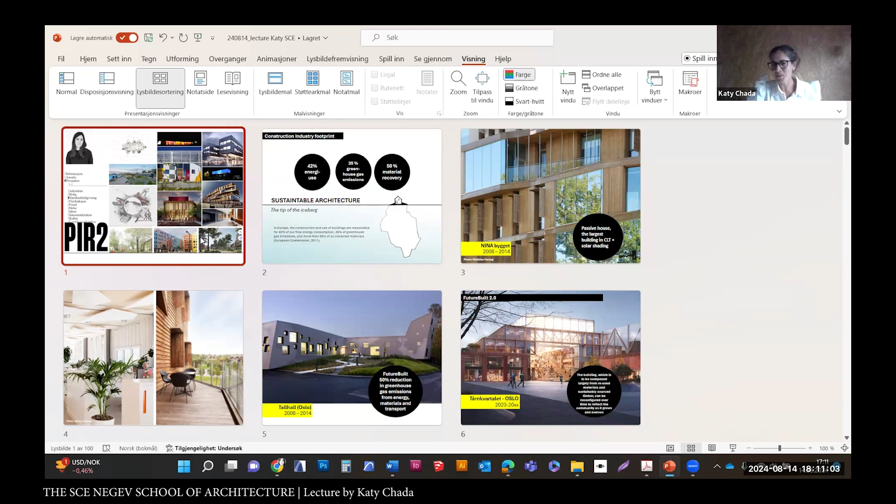Thank you, Florian, for inviting me and for the very nice presentation of myself. I have prepared some slides, quite many, so I hope they are interesting enough to keep you alive. I hear you are in the last part of your semester, so let's get started.

I will shortly talk about the office where I'm working. It's called Pir 2. In Norway, the partners started the office 30 years ago. We have offices in Trondheim and in Oslo, the capital of Norway. I've been a partner in the office for 15 years now.

I've been involved in very many of the projects, and I've also led the office in two different periods. This is just a sample of what we do. We have landscape architects, interior architects, regulation architects, urbanism specialists, and a huge interdisciplinary team.

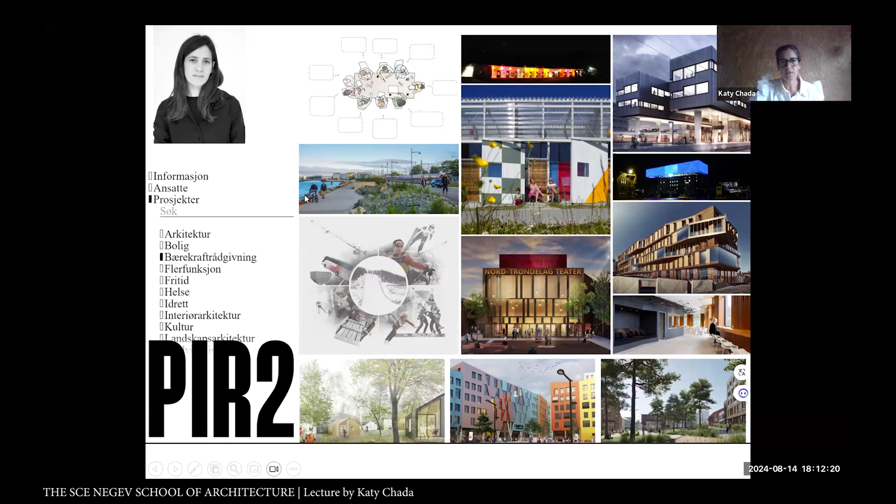We do a wide range of different building typologies, so I'll just show you a small selection of projects, probably the ones that are more distinguished because they have a more ambitious profile regarding sustainable architecture.

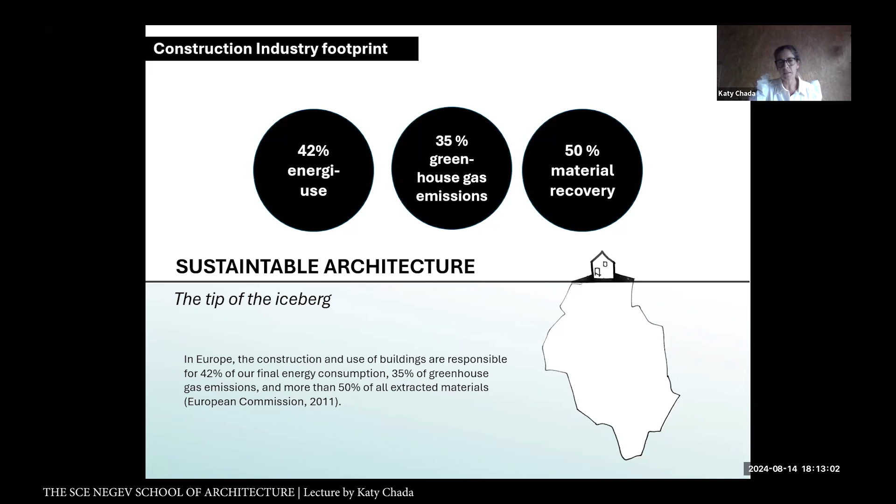Everybody in the room is probably aware of how the construction sector is responsible for emissions, energy use, greenhouse gases, and material recovery issues. As architects, we have a strong sense of responsibility for the resources we work with, so in every project we try to do whatever is possible to make more sustainable architecture and environment.

These three projects I'll talk about are probably at the forefront of other projects both in Trondheim and Oslo, and in the office in general — some of them gave us the opportunity to experiment with more advanced solutions in terms of sustainability.

This one is an office building called NINA, for ecologists actually working there, who had a strong ambition of doing good with nature. This is the first passive house in Trondheim, the largest building in CLT, and we explored a variation of solar shading to achieve shadow on the facades, but also to make interesting zones between the working offices and outside recreation places during breaks.

In Oslo there's a project called Future Built, a pilot project aiming to show it's possible to be net positive. It started in Oslo, and now it's in six main cities in Norway; this year it's about to be in Trondheim. This was our Pir 2 first Future Built project, about 50% reduction in greenhouse gas emissions from energy, materials, and transport, meaning we had a lot of conscious thought about what materials to use both inside and outside. For instance, the facade is 100% recycled aluminium.

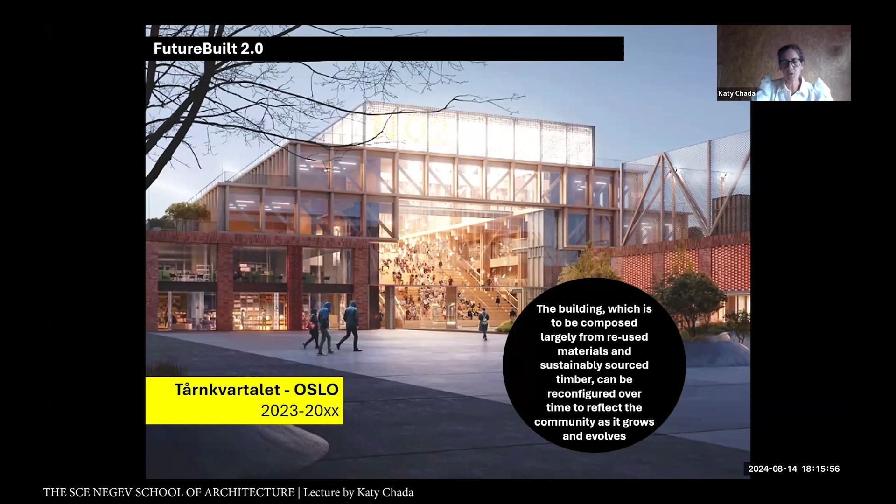So these are our most ambitious projects regarding sustainability.

Just briefly, some numbers: there's a national climate goal in Norway, as in every other country I guess. By 2050, Norway is supposed to be climate neutral, with a reduction of 95% of greenhouse gas emissions.

95 to 100% material recovery. So it's an ambitious plan in quite a short period of time.

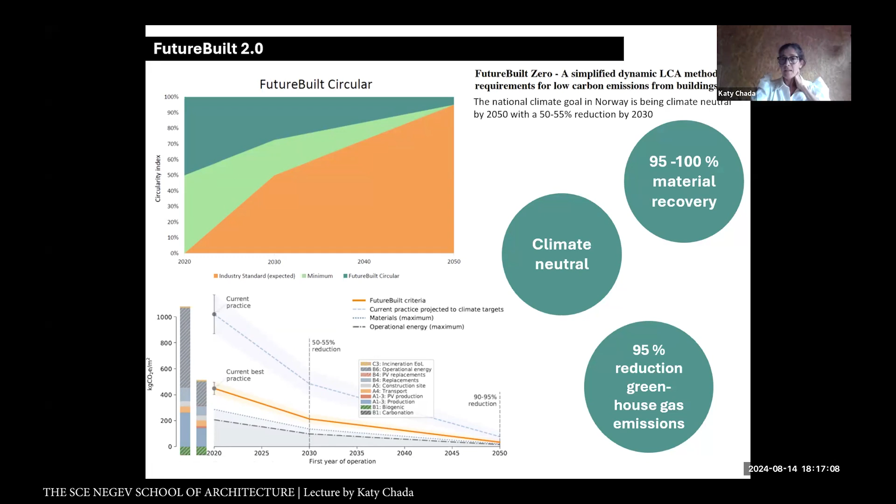So this one, the green one, is this ambitious Future Built projects, and this orange is showing industry standard, like conventional buildings. So in the end, or by 2050, we're supposed to meet all together in very ambitious climate neutral goals.

Meaning there is a way forward, but there are only few projects able to be very ambitious in the beginning, and the others are moving quite slow. Transitions towards sustainability involve technological, social, behavioral, and institutional change, which are really needed, and in an urgent way.

The pity is that in architecture, the impact is still very much related to individual buildings, and we need a systemic approach and a design methodology which follows the goals we have to achieve as nations, to be where we want to be in 2050.

So my question is: how can architecture transcend its narrow designing role and become a socio-ecological tool instead? Go beyond the building as an object, or especially an individual building, but move towards a more systemic approach.

In the future, so my own transition is moving, as Florian said in the beginning, from hardcore building industry to regenerative practice, which in the beginning, I think, is more in my search to understand the place - meaning nature and people - and designing processes and buildings as well.

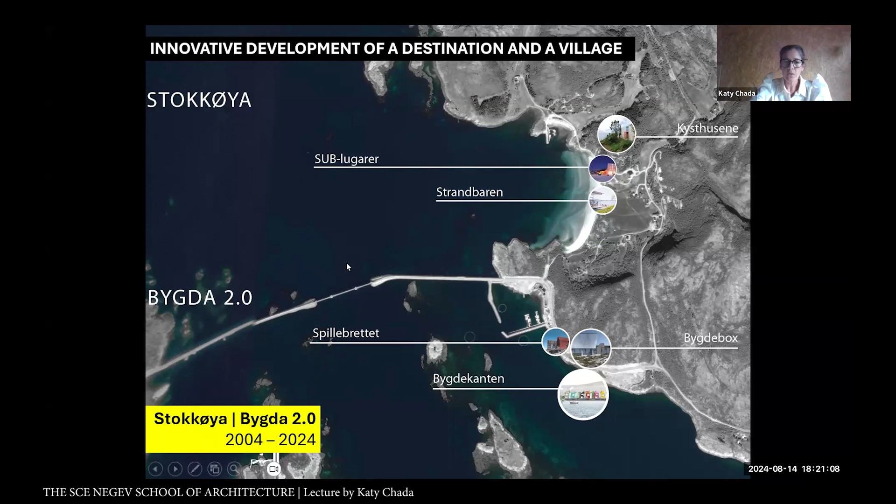So this is kind of an ecosystem. It's been developed for 20 years now. And I will tell a bit about how the process was, since I started working at the office in 2004.

This is the model, which was actually my first task. So I have an emotional value attached to it, and also because after these years, Roar and Turid are also my friends. They're really people connected with their environment, fishing and farming, and highly valuing the nature around them, living in contact with nature as well.

They're creative people and very visionary, so we've been lucky to have them as clients, accompanying them, sustaining the local identity, community, and environment. They have huge ambitions and pillars like nature, architecture and design, food and experiences, culture and art, and meeting places.

Their vision was to make a place, as I said, which was interesting both for them to live there, for their children to raise, but also to attract creative people to the countryside, where, like everywhere else in the countryside, we experience a brain drain - the creative or more forward-thinking people are leaving the countryside towards the city.

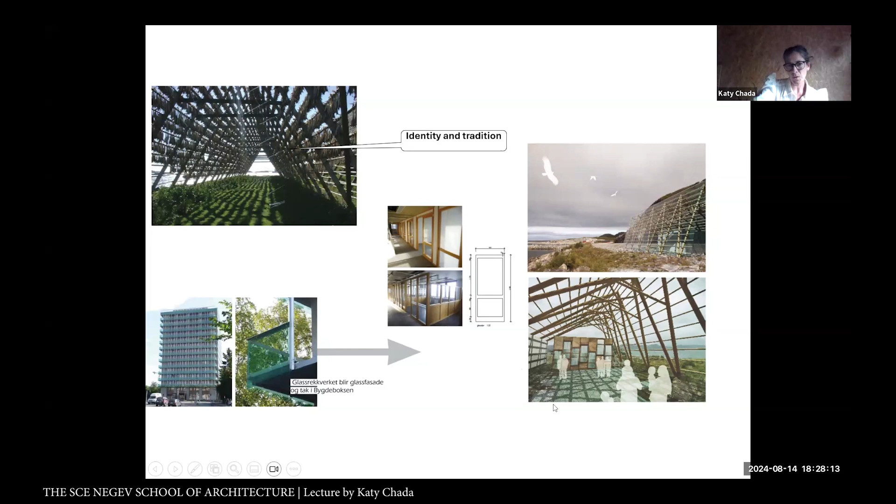The other interesting thing is that we were working with half-climatized zones, which is less expensive to build and rougher in its expression, because it's supposed to be a lab and a meeting place, a multiple functional room for whatever the need was.

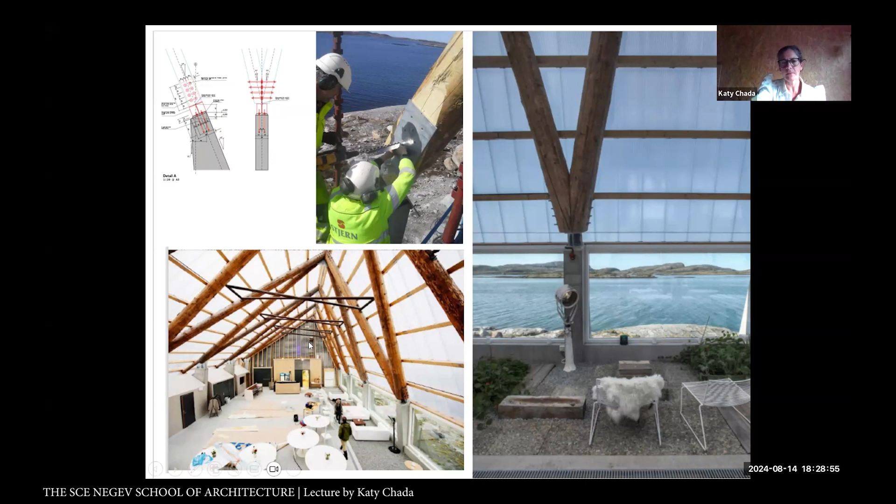So the idea is that very different activities take place there, like for instance a brewery, bakery, carpenter place. There is whatever is functioning at the moment, and once it's already up and running, it will scale up and out and become part of the ecosystem, attracting more and more people to live and work there. So it's a very interesting place to develop this village.

Also, it's an office hotel, so people visiting or owning the cabins could come and work here. It's always full, and it's super nice to sit there and work with internet connection while different people are doing different things. So it's a co-working space that works perfectly, especially during the pandemic and after, because it started with another rhythm of weekdays.

There is also a bakery which won the Norwegian National Prize last year for the best bakery in the whole of Norway, so the quality is amazing. There is a pair of Italian people who moved there to run their bakery, and they are now based there all year round.

So this is the project for when people are moving to the countryside, they needed housing, and also interesting housing - not just housing that's been there for ages and expensive to rebuild, or not interesting, but trying to have some urban qualities into the housing in the countryside.

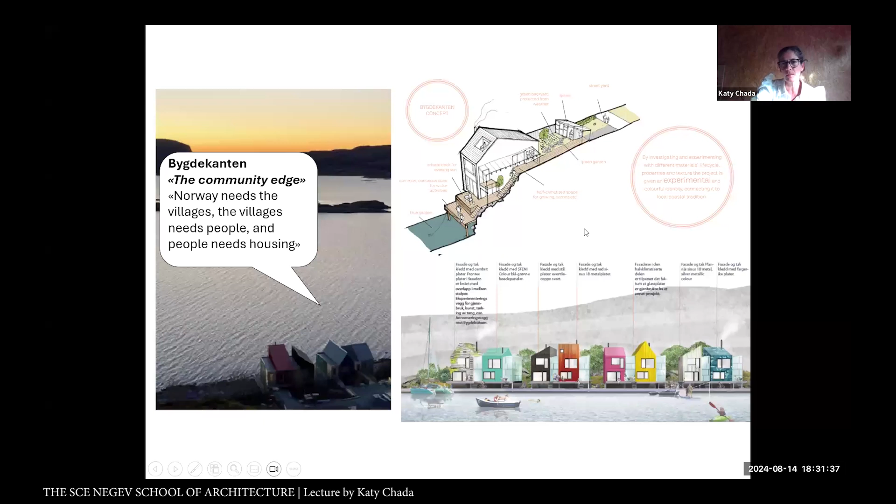So by the time being, only 4 of them are built. It's on this side, and 4 more are still to come. So here you see the structure, different sizes of houses to have some variation, but everyone with the same principle.

So there is also playfulness with colors and materials, and here you see these half-climatized zones, which have the stairs and the connections to the climatized part of the houses. So here people are bathing all year round and kayaking, having both qualities of urban and rural long days.

So this connection with the exterior and interior - it's very rough out there, it could be very windy or rainy, but beautiful at all times. So this transparency really makes the impression that the house is bigger, even though it's very compact in the planning.

So a micro community takes shape. There are more houses there - 3 more which are now in the building process, and it's going to be another cabin project to the right here, and we are at the moment developing a regulation plan for the last site of Bygda.

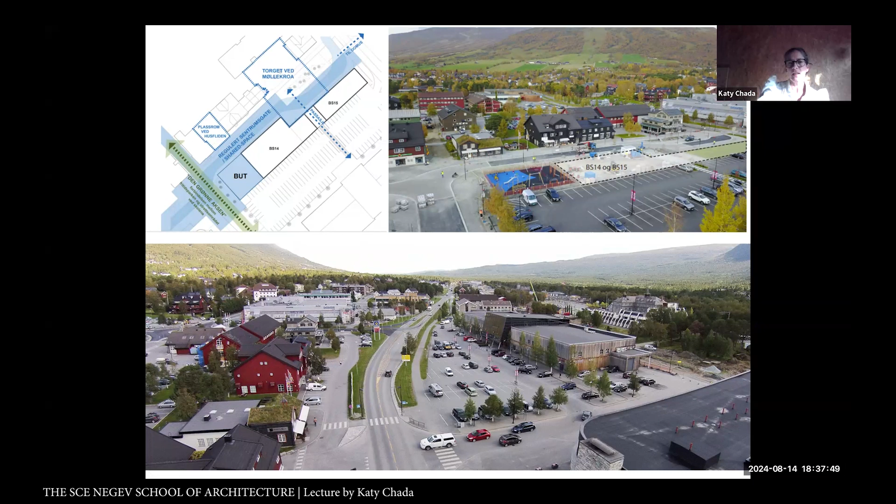In the end, I will just go through what happens in the beginning and in the end, and how it comes that architects being outsiders - even if we were collaborating with the locals - how is it that we kind of miss the opportunities of bringing together people and place in the early phase of the projects?

So this is the concept. I will not use very much time on it, but the plot was really long - like 90 meters and 13 meters in the other direction. And the program was mainly offices, boutiques or shops on the first floor, and a climbing tower, which was supposed to be the highest in Norway.

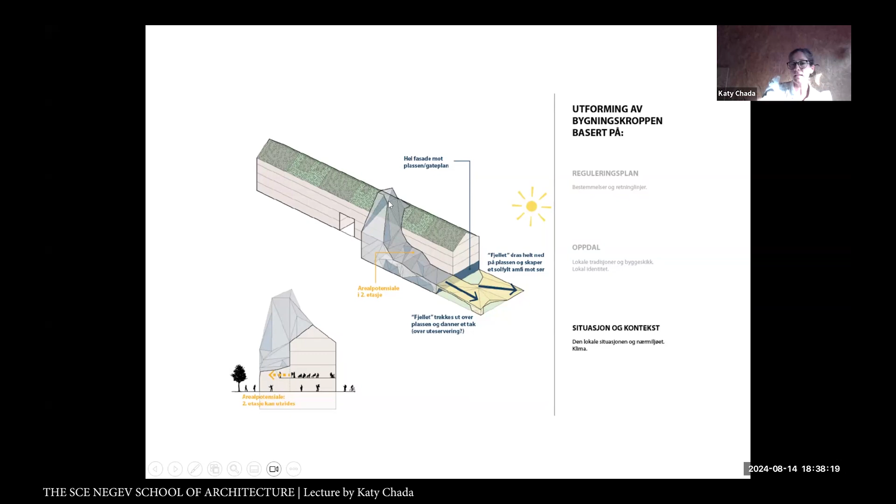So we did this concept of the very traditional barns, which you see in every place in the countryside in Norway, and based on local identity, tried to build a mountain. So the huge climbing place inside will be also a place to be outside.

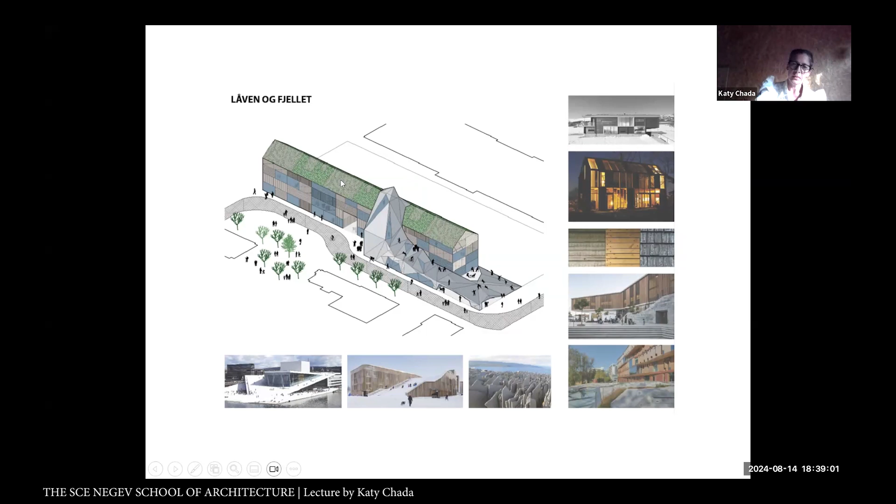Once we thought we take the very best site of the city, then we should try to give something back to the inhabitants, so everybody could be there and use it. So our main idea was to make this mountain very attractive, both for climbing and cycling, and just as

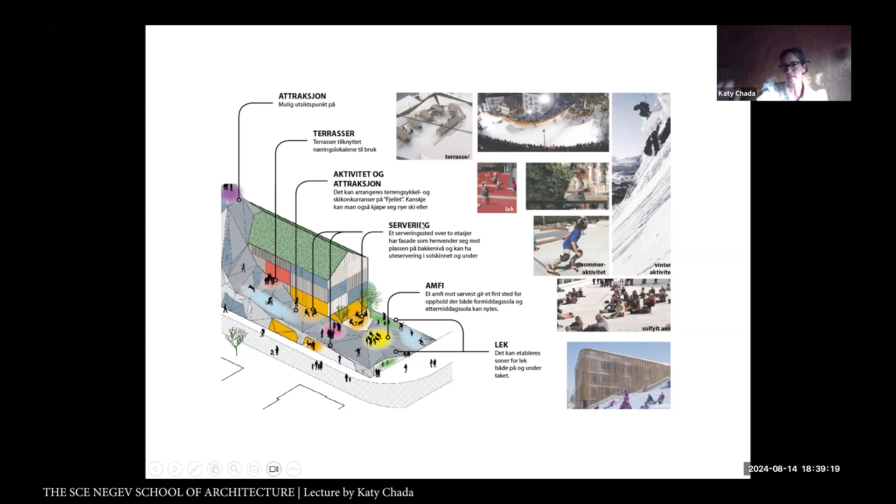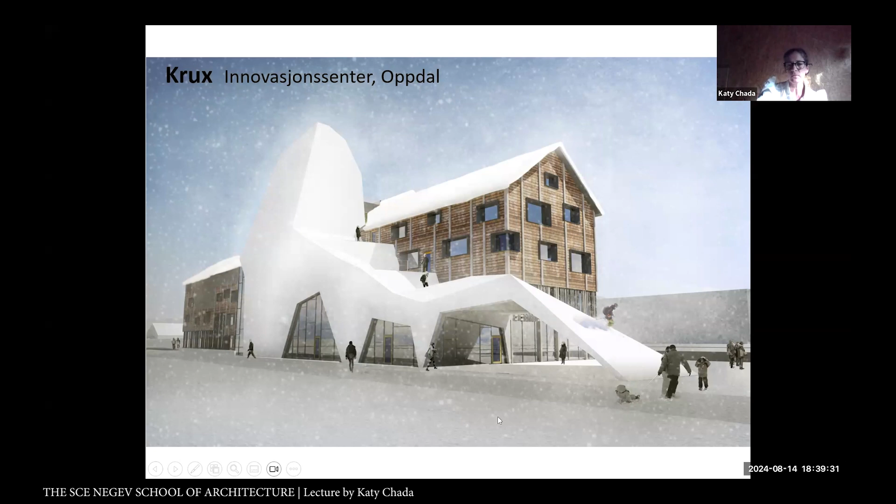an amphitheater or to play or whatever the activities during the year should be. So this was one of the early visions of how the connection between the building and the place should be. We did a lot of drawings trying to convince people that even if they did have a nice place or playground for children, it could be better if it was connected to the building.

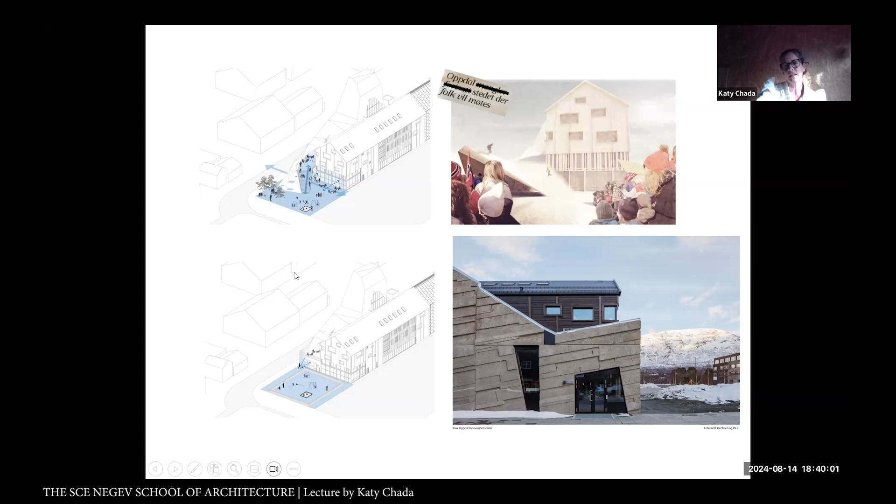But there was massive protest, and in the end, they didn't want to make this construction, but they didn't want to have it as it was before we had the building. So this was one of the frustrations we as architects had, not being able to connect the place, the building, with the public space in front. So it felt more like an amputation.

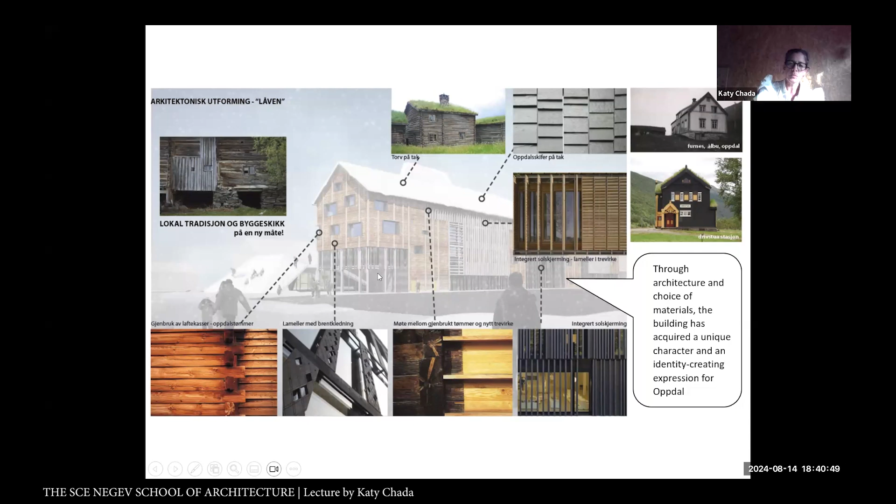The other thing was we were working a lot with traditional materials, again, like looking at the tradition, but with a new identity, or with a new contemporary way of putting materials together. So it could be identity creating expression for Oppdal, based in tradition, but with a new look.

We did a large account, or check, after material in disuse, because there is a lot of timber and old houses that are not used anymore. So it was sufficient to build the whole building in a new way as well. And we proposed to reuse all this old timber from the old barns to build the new building.

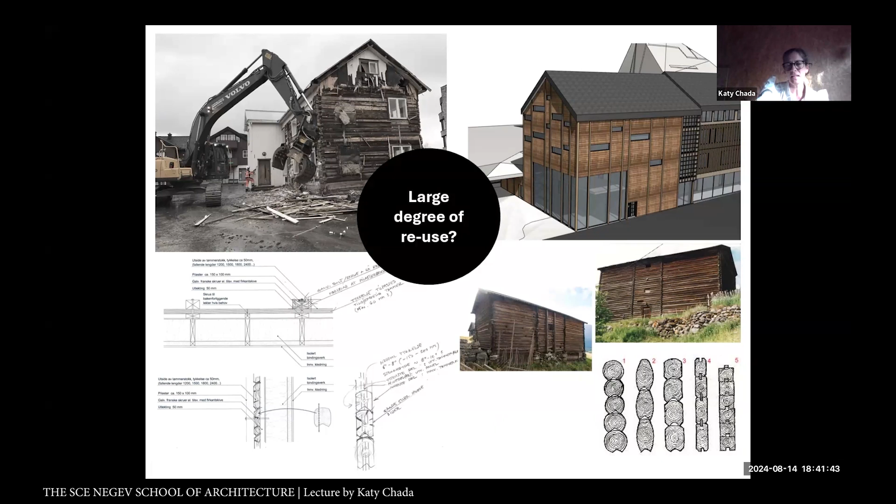But we came quite long - we did all the detailing, and we were really enthusiastic about it. But in the end, the entrepreneurs didn't want to take the risk. They said that it was going to ruin their machines or whatever. But the thing is that probably it was more expensive and more work to do it that way than to buy new materials. So in the end, we managed to have a palette of materials which was also built in wood. So it wasn't the worst thing, but

I think this is one of the things that should be changing quite soon, especially when there is a public client backing the buildings. So actually now things in construction are changing quite fast. Now it's supposed to be easier to reuse the materials and to have this mapping in an early phase of the project, as we did, but probably a bit too early. This was in 2017.

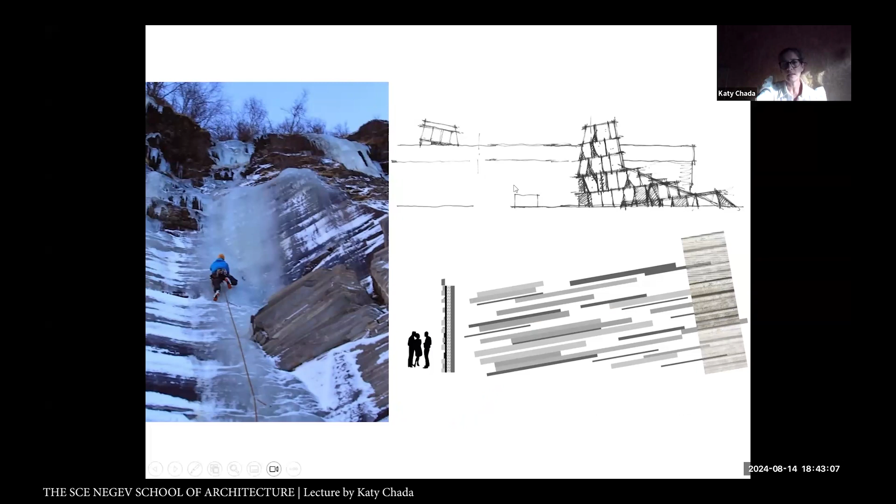The other part of the building is the mountain. We used the inspiration of climbing to make the identity of the facade, and we worked with concrete, connecting the inside with the outside. This was sandwich elements which were built in a factory and transported from about 2 hours away. Every element, I think, was 15 tons, so it was just like a three-dimensional puzzle to make it perfect.

There was no margin for error here, and also because the construction was too tight, it was really a challenging design. And here is the one thing that illustrates perfectly well why new approaches of systems thinking are needed.

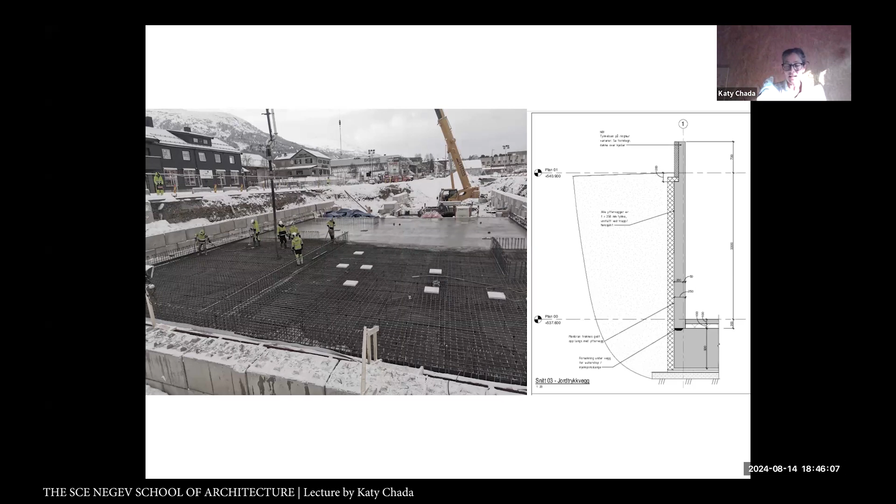So suddenly I was the responsible architect of this huge construction place, and I had no chance to interfere with the amounts of concrete or steel being used. This actually gave me nightmares for a long time - concrete nightmares.

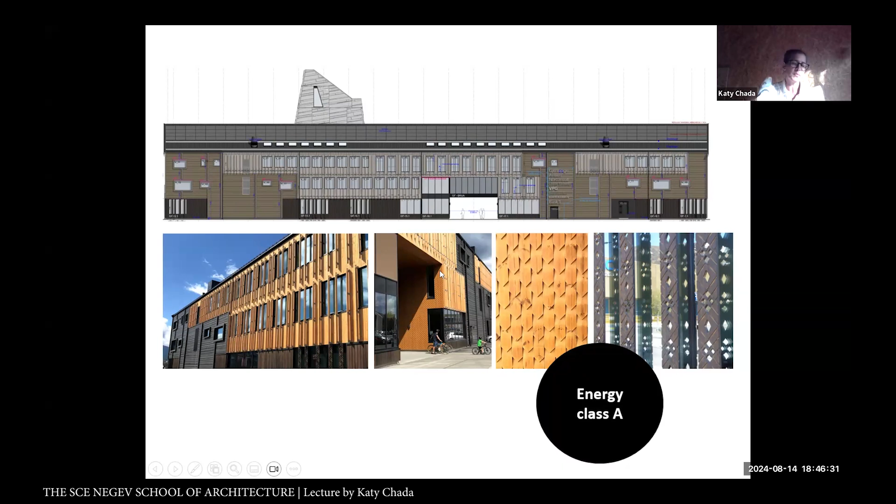But in the end, nobody sees what is below the ground. And the building is energy class A, which in the district is quite okay. People are happy that they produce their own energy. Now the building is taken into use and everybody loves it.

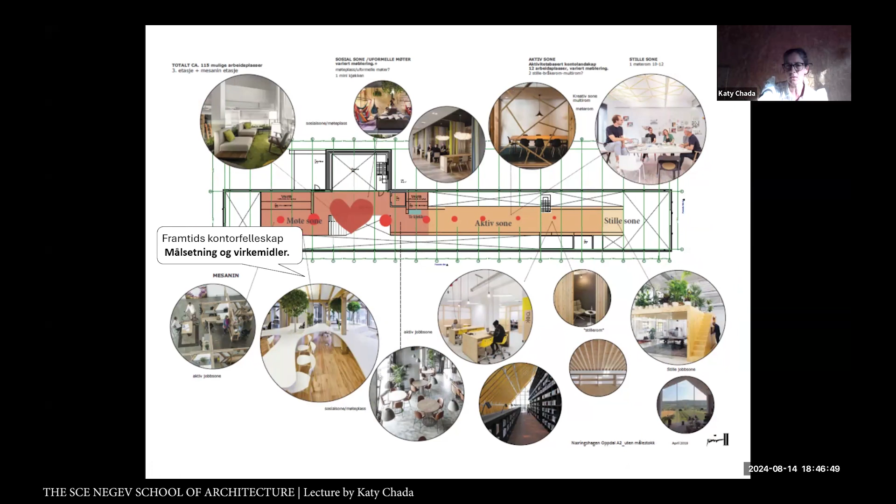The interior was made with a very bottom-up process, which we enjoyed a lot. All the offices were designed with the people who were supposed to be working there, so it's a very flexible and nice area to work.

It's very popular for cabin people and visitors, who use it as a co-working space on weekends and holidays. So now it's built, and it's a much-liked part of the city center of Oppdal.

Despite all my frustrations as an architect, in the meantime I became aware of these top-down versus bottom-up processes, and I've been traveling a lot to Oppdal, getting more in contact with locals and the community.

I started to work with projects involving stakeholders, looking at how these cabins are being built all over the place, ignoring the soil and all the levels of the landscape, just making a tabula rasa and putting objects pretty much on top. So this is a strategy of building sustainable alternatives to traditional cabin construction to reduce their environmental impact.

It was three workshops with a lot of people involved - from construction, political people, the administration, and visitors - and everybody was trying to find better solutions for how to build these second homes in Oppdal.

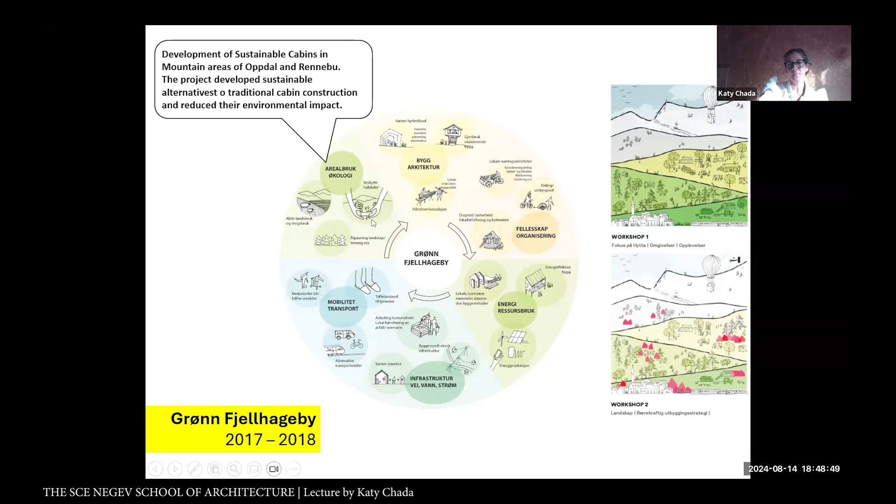This process was parallel - I was in Oppdal like every week because of the construction, and working in parallel with this very much bottom-up strategy building project.

We did different scenarios for different types of cabins: the urban cabin, one trying to support the farms which already exist, and just a few of them which were supposed to be built on top of the mountains.

So we were working with scenarios based on what people themselves wanted to do. We're pretty much changing our role of designers to be co-creators of whatever the development of cabins should look like in the future.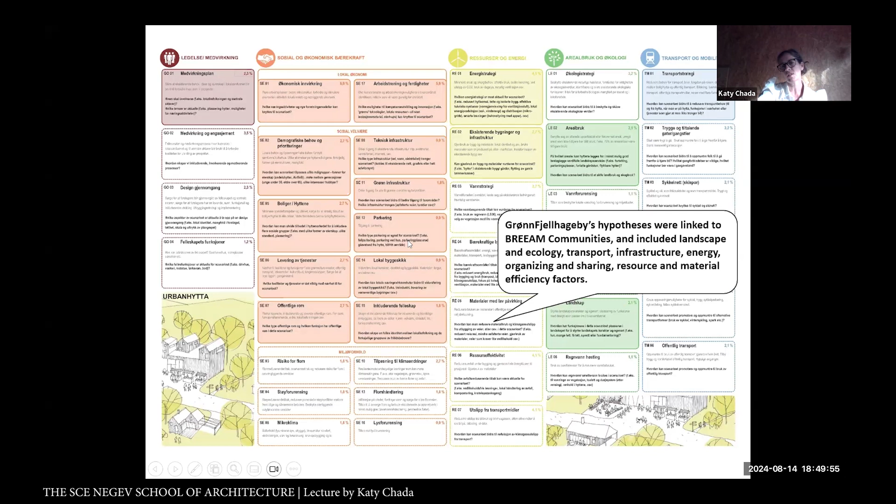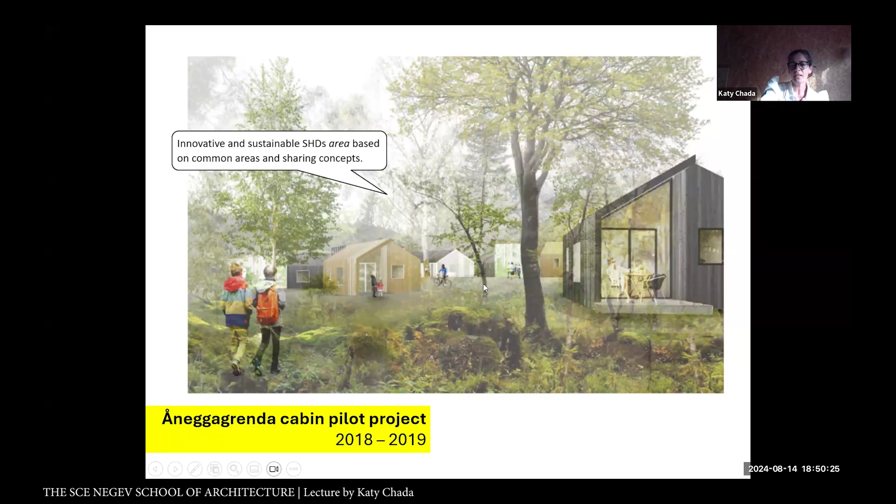This is one of the pilot projects of this strategy, which we designed as well, and it was based on reducing the footprint of the cabins, being very gentle and subtle with the landscape, very gentle also in the foundation - no concrete here - and only using materials from the area.

We based these cabins in common shared places, so not everybody needed to have their own skis or their own stuff, but they could share, and also share a common house to host different events.

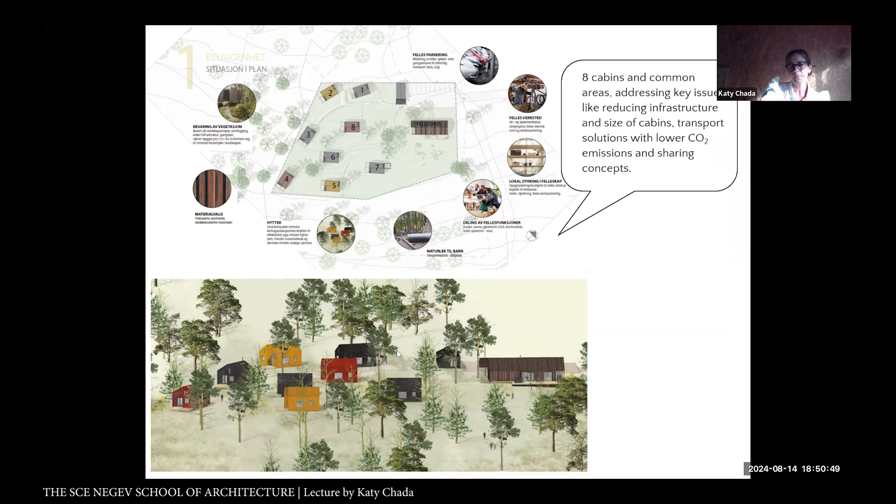This is how it looks after finished. What we found here is that to move from A to B, we didn't have any kind of data to relate to. So the benchmarks were really difficult - we couldn't say okay, we're going to do less of this or more of that, because we didn't have measures to show we're doing better, taking more care of nature, or that bird life is not going to be so disturbed - there was no measure from before. So it revealed a lack of data.

The other project is a Living Lab Oppdal. I think most of you are familiar with the concept of Living Lab. It's usually more related to urban places, but there was no Living Lab related to mountains.

So we presented this project and got some funds to develop an ecosystem of sustainable leisure, taking the focus out of only cabins and looking more at mobility and all the other systems involved in cabins and leisure.

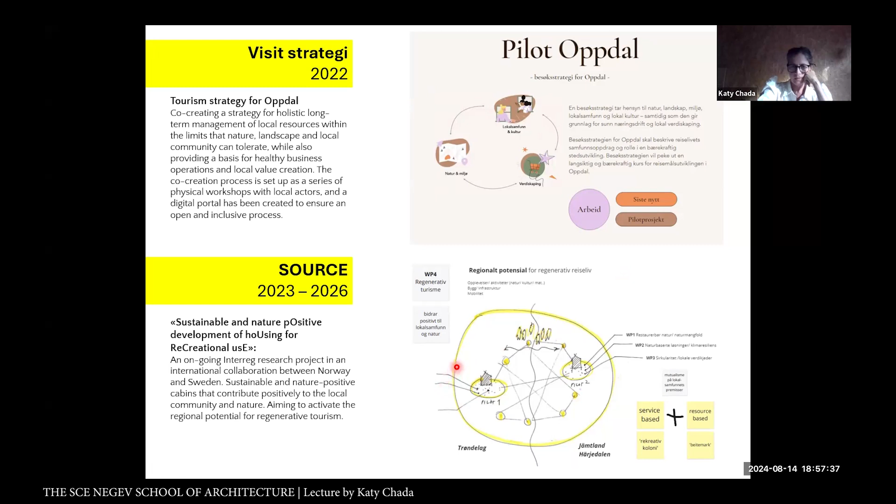In sum, all of this, my work in Oppdal, has been very tempting for me to join this interdisciplinary team of ecologists, landscape specialists and biologists on one side, and sociologists on the other. We're going to start a project called Common Ground, or it's already started, but this is where I'm going to begin.

On the 1st of September I'm starting my PhD, which is going to be about future-proofing Norwegian leisure, and working with regenerative rural communities using architectural approaches.

This is a very ambitious project, where we're going to study trends and patterns and develop national strategies for areal use together. We're going to test concepts, it's a very hands-on research project, not only papers.

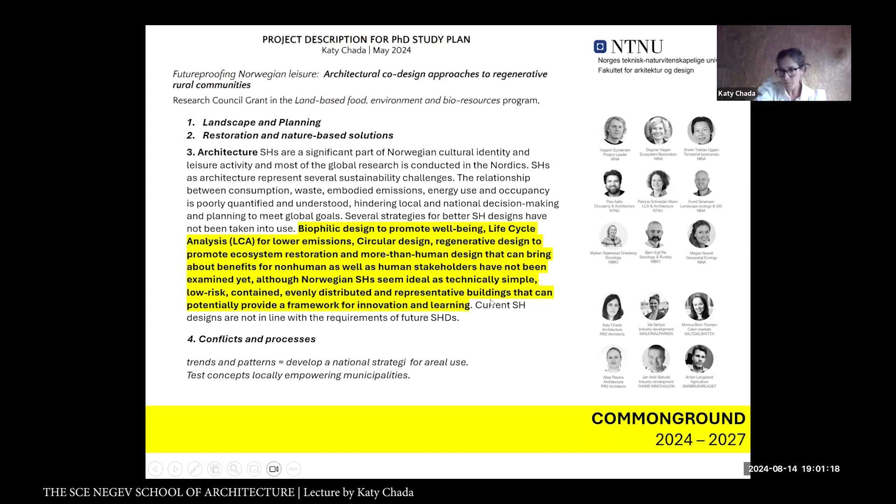Thank you so much. Do you have more charts? Because we are now at 7, so we have half an hour for some discussion.

Yes, but also including discussion and our small discussion. So I don't know how long. No, this is going to be super fast. If I have, I will just rush over for 5 minutes.

This is a challenge-based design process. We're just going to show you how we work, how I've been working with stakeholders and developing different methods to get closer to the people and to understand the needs in order to make innovative solutions.

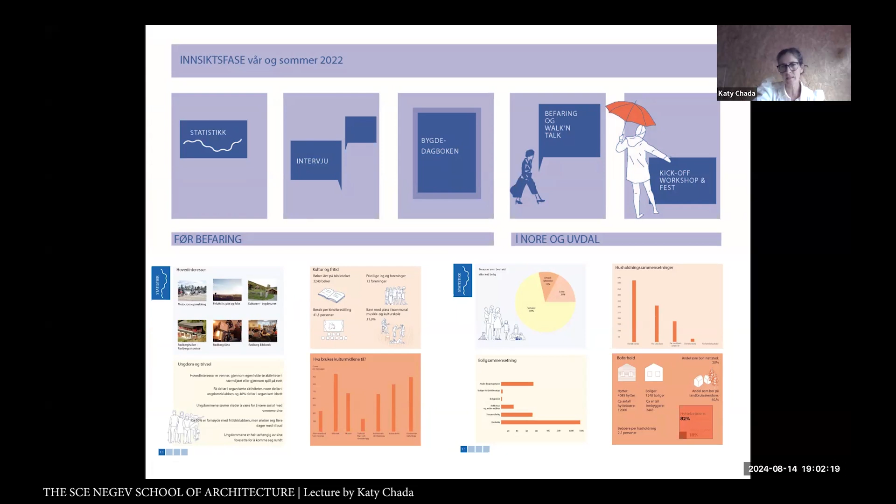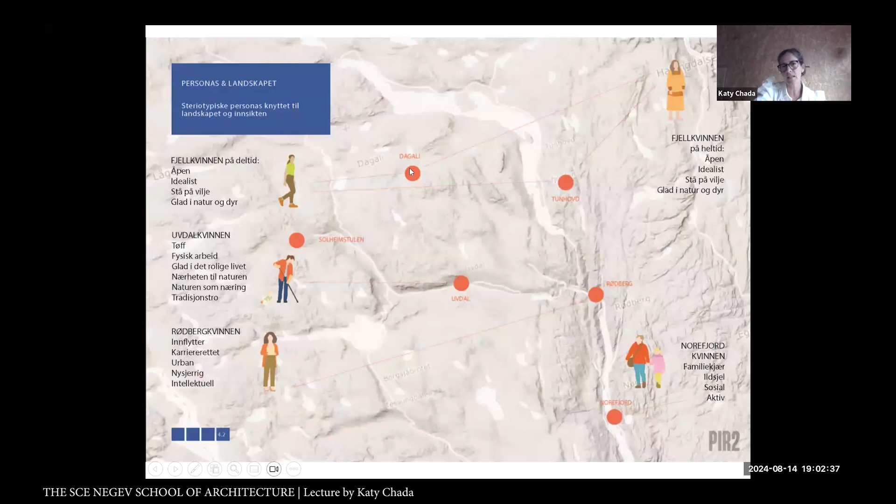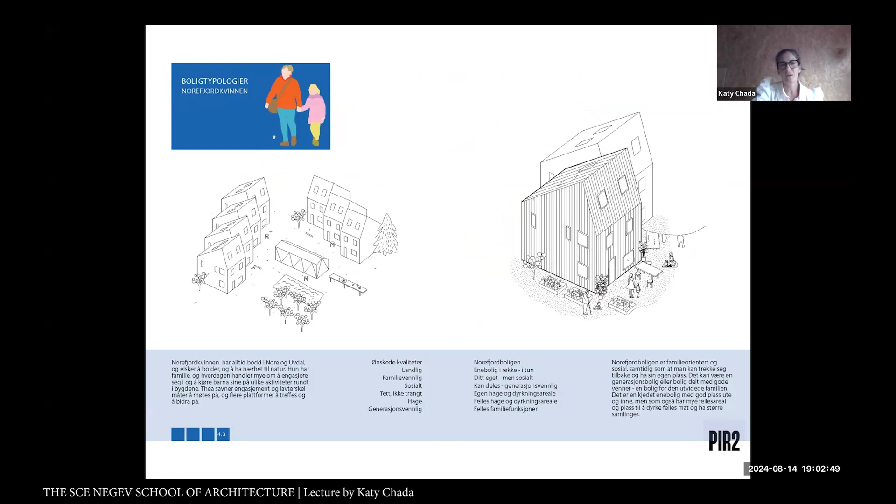So here we collect these personas related to the landscape, and we made different kinds of housing solutions to the different people, collecting typology with geography. So this is just an interesting design process involving very many actors.

And in the end putting it together in the same kind of ecosystem thinking as I showed you in the other projects. So how to design not from women to women.

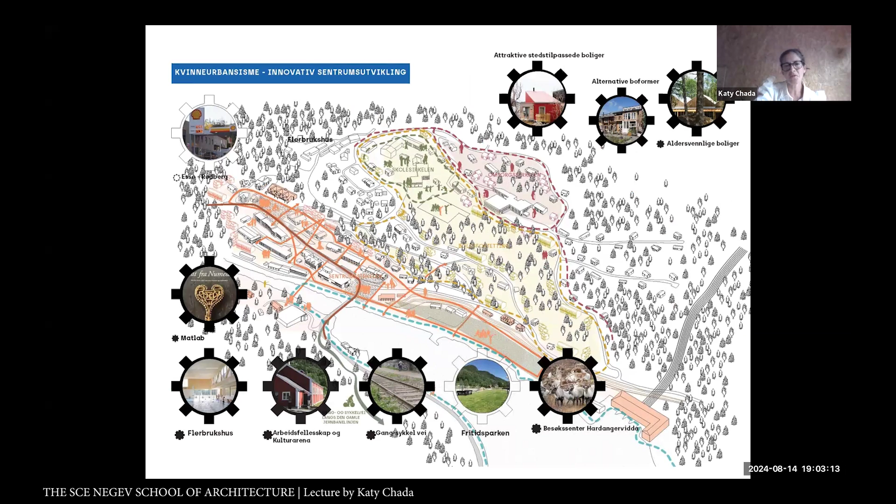That was the main empowerment of women, so they will be attracted to live and come back to their places.

And this is about this Certificate of Advanced Studies we are sharing with Florian at the ETH Zurich, studying regenerative systems. Again, in my search of combining my practices as a farmer and as an architect.

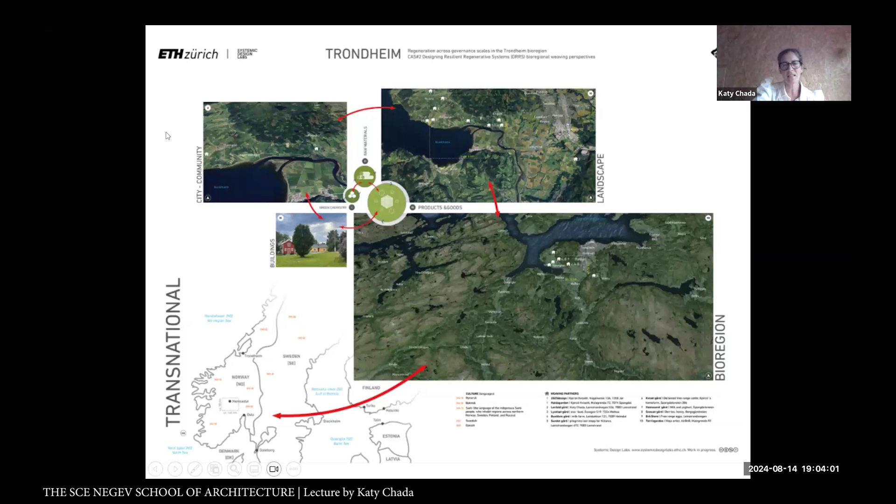So this is pretty much what we are developing, co-creating together with Florian and some other CAS companions which we are enjoying and learning a lot. So this is just to show very fast how we do, at the same time, learn and use the tools.

We are, I think Florian mentioned that you're also using these circularities and 8 scales of circularities. So these are very much...

Hi, thank you. Thank you so much. Welcome.